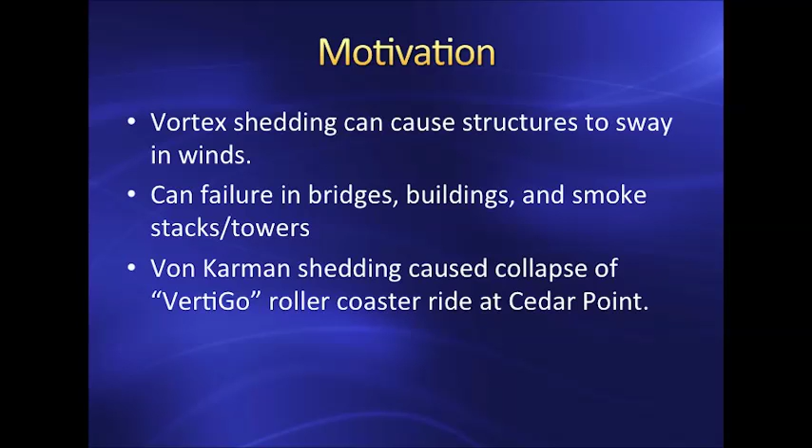Vortex shedding was found to be the cause of failure for a tower of the Vertigo roller coaster at Cedar Point in Ohio. The 2D system was modeled in ANSYS as a surface. The flow domain was a 30 by 15 meter box with a 1 meter diameter circle placed 16 meters from the inlet and 7.5 meters from each no-shear wall.

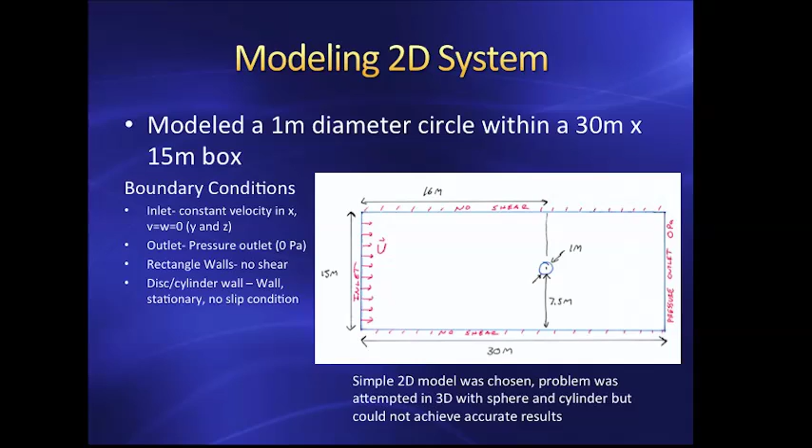Boundary conditions were set to a constant velocity in the x direction, outlet pressure set to 0 pascals, no shear condition at walls of the domain. The disk cylinder has a no-slip condition to induce drag vortices.

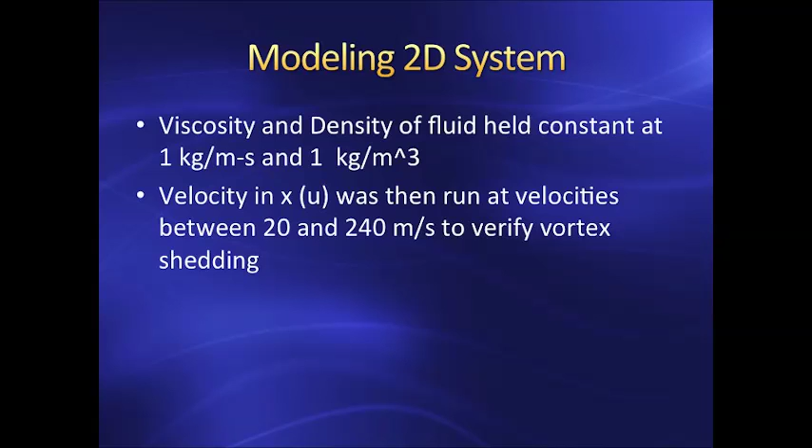In order to study the effect of Reynolds number, viscosity and density were held constant. This meant Reynolds number was entirely dependent on flow velocity. Velocity was run from 20 meters per second up to 240 meters per second.

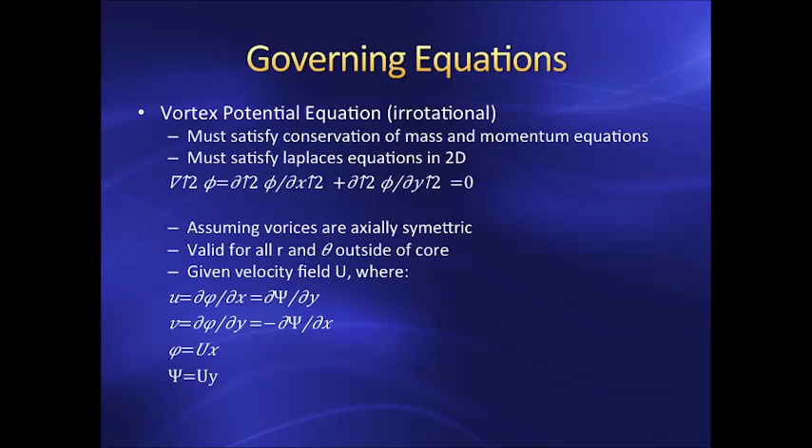The vortex potential equation is the main governing equation for this phenomenon. This satisfies conservation of mass and momentum. This also satisfies Laplace's equation in 2D. Velocity equations are converted to cylindrical coordinates, and for 2D flow, del cross V must be equal to 0. For the 2D case, all z derivatives are 0.

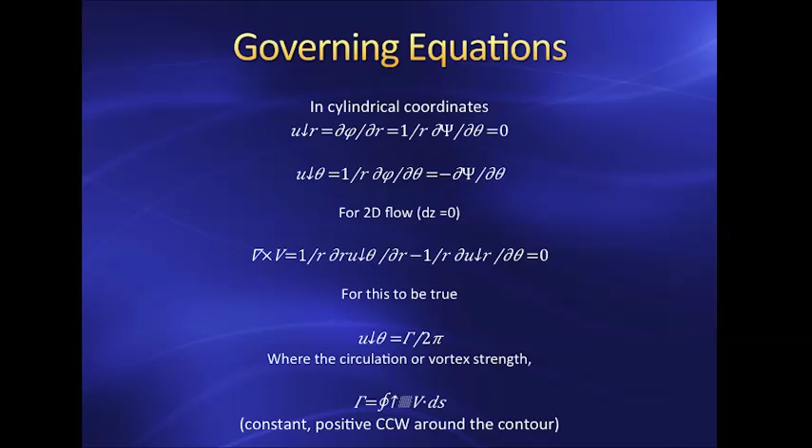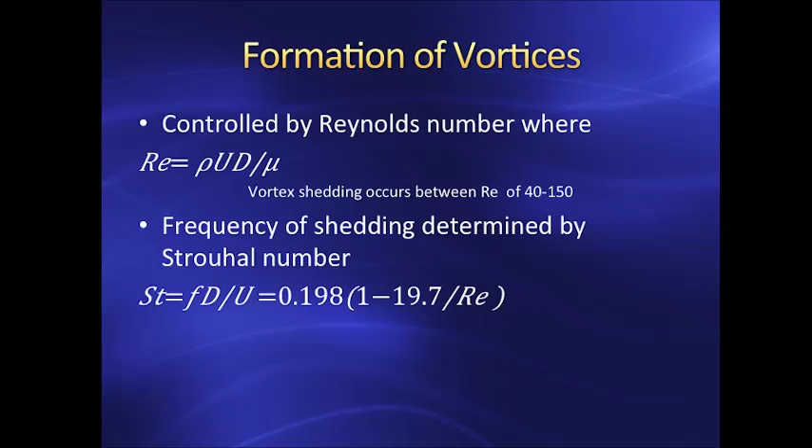Vortex strength is a constant value calculated by the line integral of velocity around a contour. ds is the differential length around the contour. Vortices are controlled by Reynolds number. Sources gave that the range of shedding should occur between a Reynolds number of 40 to 150. Frequency of the shedding can be backed out of the Strouhal number.

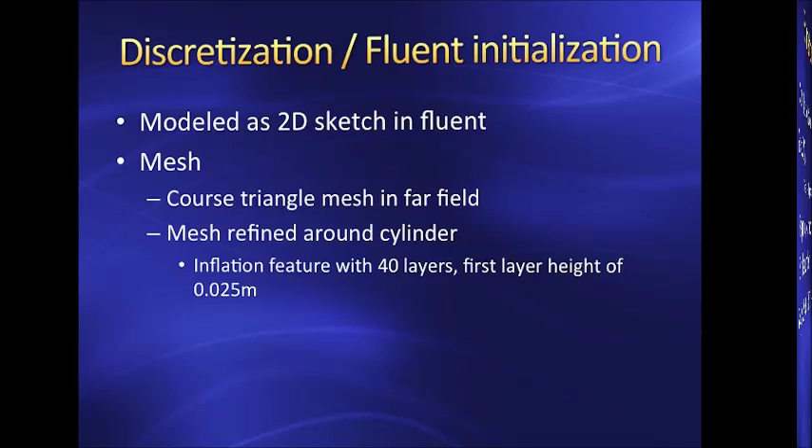The 2D sketch was meshed in ANSYS. A coarse triangle mesh was used in the far field. Around the cylinder, the mesh was refined with an inflation feature of 40 layers, the first layer having a height of 0.025 meters. This increased radially.

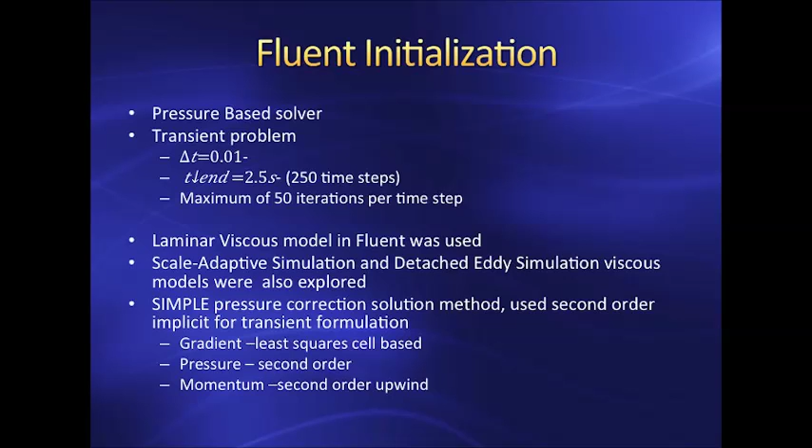The SIMPLE pressure correction method was used to solve the transient problem. Time step size was 0.01 seconds, and the solution was run for a total of 250 time steps. The laminar viscous model was used. Other methods were explored but significantly increased computing time. Results did not change much.

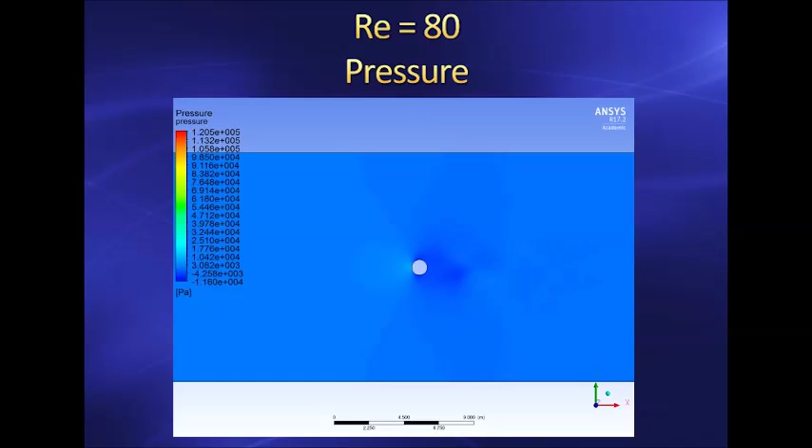The following videos show results for a Reynolds number of 80 and Reynolds number of 240. In 80, vortex shedding is visible by both pressure and velocity contour plots as an increase in velocity, decrease in pressure.

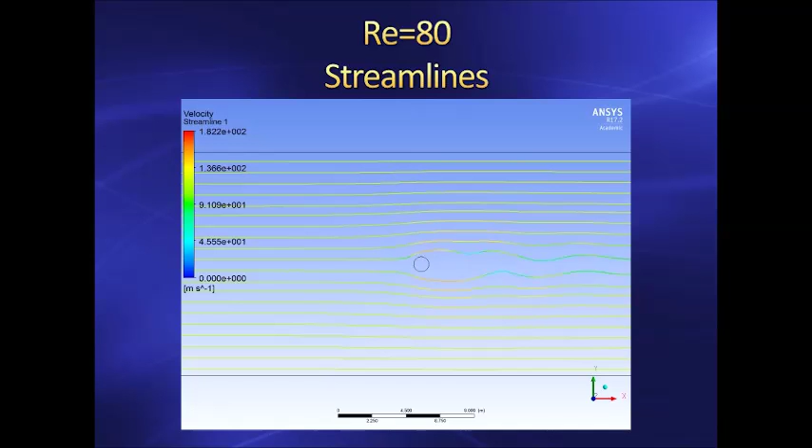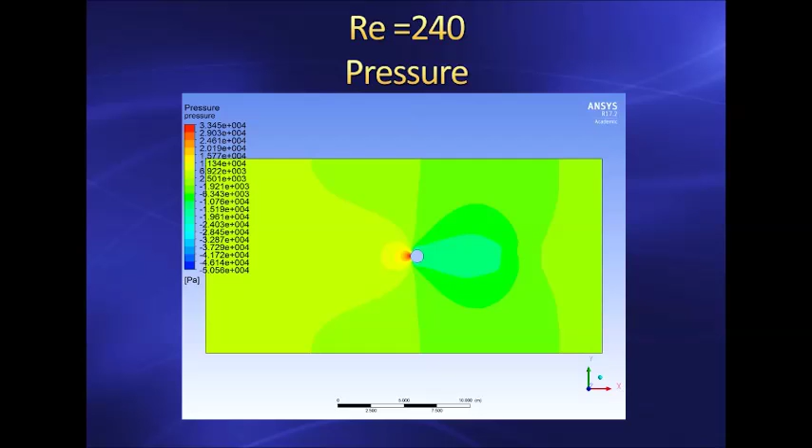For the Reynolds number of 240, flow is uniform and no vortex shedding is shown. Pressure and velocity distributions develop early and do not change over time once fully developed.

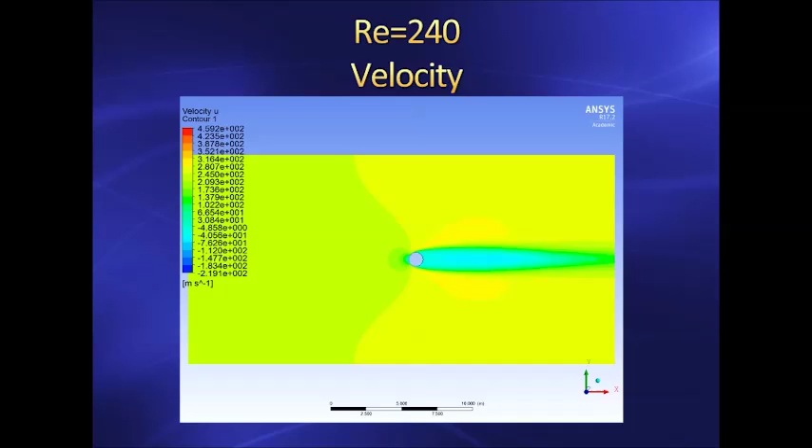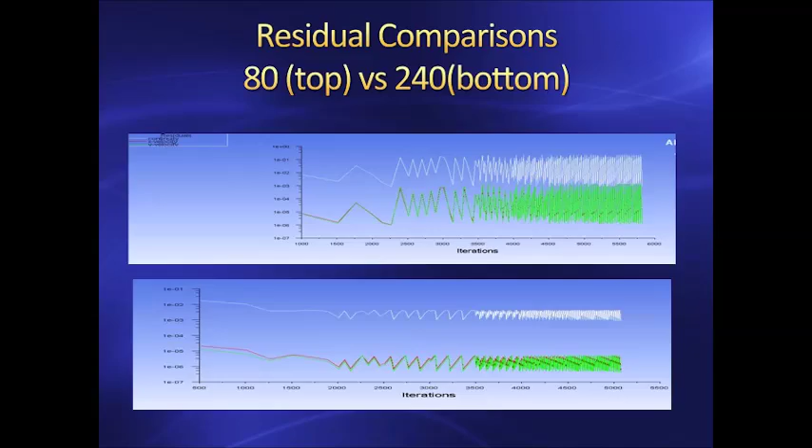Lift coefficients can be compared to show how lift forces could be potentially destructive when vortices are shed. Residuals were compared as well, but being a constantly changing transient solution, the residuals don't actually tell us much about the solution.

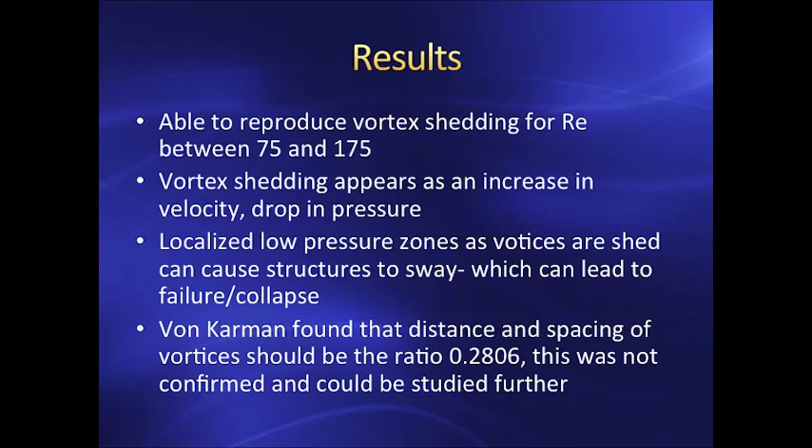Vortex shedding was reproduced for Reynolds numbers between 75 and 175. Below and above these values, vortex shedding was not occurring. Vortex shedding manifests itself as a local increase in velocity and decrease in pressure. Von Karman found that the ratio of vertical separation and staggered distance of the vortices should be 0.2806. This was not verified and would be an interesting subject to study further.